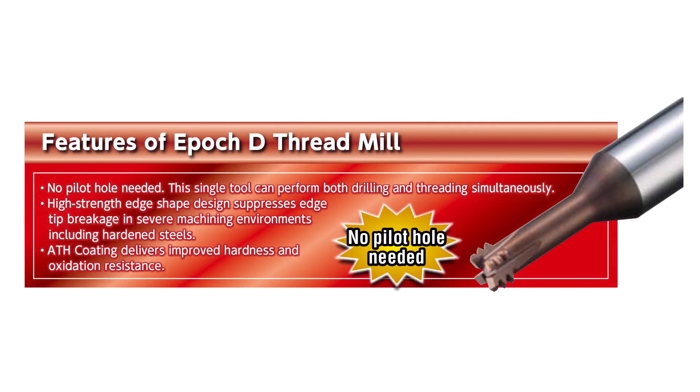Hello everyone, today we're going to be talking about the Moldino EDT thread mill and how to program this tool in Mastercam. This thread mill is a single lead thread mill that can cut the entire threaded hole without the need of a pilot drill. That is the big advantage of this tool. You can do this in hardened material and virtually any material, and you do not need to have a drill ahead of it. So today we're going to show you how to do this in Mastercam.

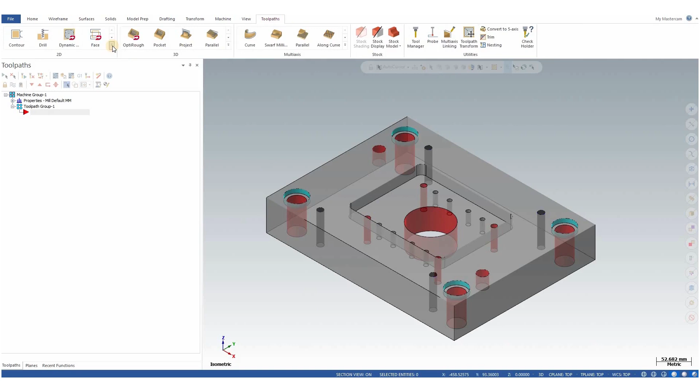And on this plate right here we have 4 threaded holes. They are M12 by 1.75, and we're going to show you how to do this to get the code to come out correctly for your machine. So the first thing that you want to do is go up to your toolpath and select thread milling. Once you've done that, then select the 4 holes that we're going to thread mill. You want to make sure that you select the geometry of the hole, and you want to double check and make sure that the hole is the correct size, the nominal size of the thread.

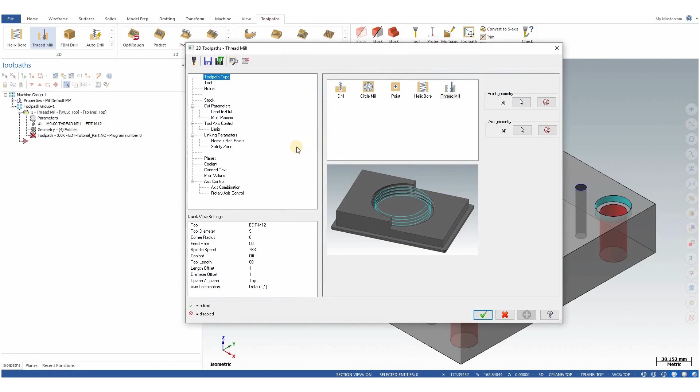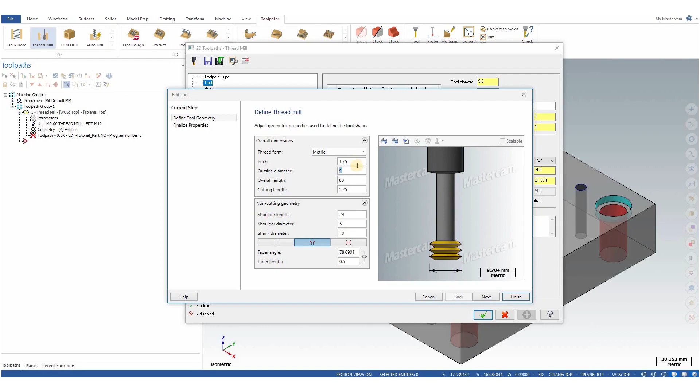So in the tool parameters, we're going to look at the cutting tool. I've already got it created. This is, like I said, an M12 by 1.75. You can see here that the tool has about 3 threads on it. That's how they're designed, but they really only cut with 1 thread. Please go to the catalog and get the dimensions of this thread mill, and you can see the lengths and the diameters that you'll need to create the tool. Like I said, our pitch is 1.75, and then we're going to put in our cutting length, which is about 3 threads.

Once you've done that, you can get the speeds and feeds out of the book for the material that you're cutting, but the main thing you want to look at is the spindle direction. Please make sure that the spindle direction is counterclockwise. This is a left-hand cutting thread, and it needs to spin the tool counterclockwise, or an M04 in a standard G-code program.

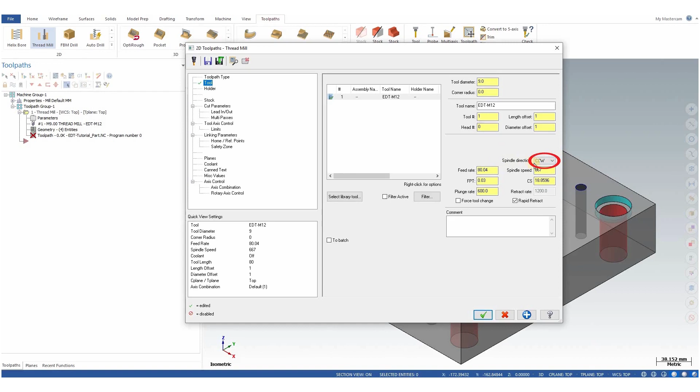Okay, moving on to cutting parameters. As we talked about earlier, this is a single lead thread. So in Mastercam, it defaults to the number of teeth as you put into your tool. So we're going to need to change that to 1 active tooth. We're going to do an ID thread. We're going to do a right hand thread. We need to make sure that we specify this thread goes from the top to the bottom instead of bottom to top.

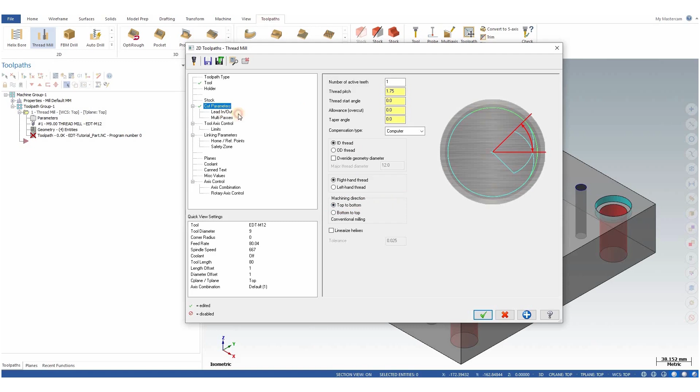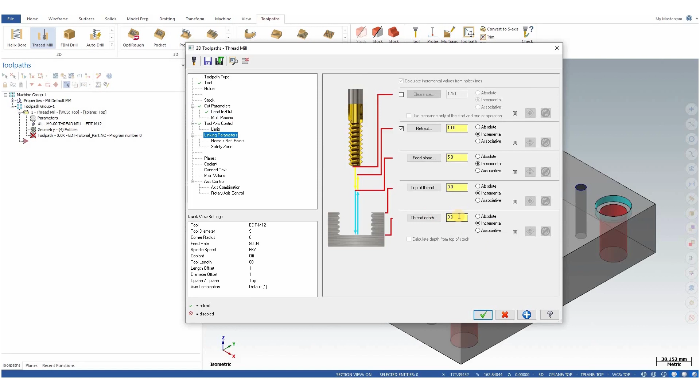Then on the lead in and the lead outs, we are going to start at the center and end at the center. We want to make sure that we end at the center so this tool does not hit the side of the threads as we exit the hole. And then we'll go into our linking parameters and add our depth, and then we will apply it, and we will look at the toolpath.

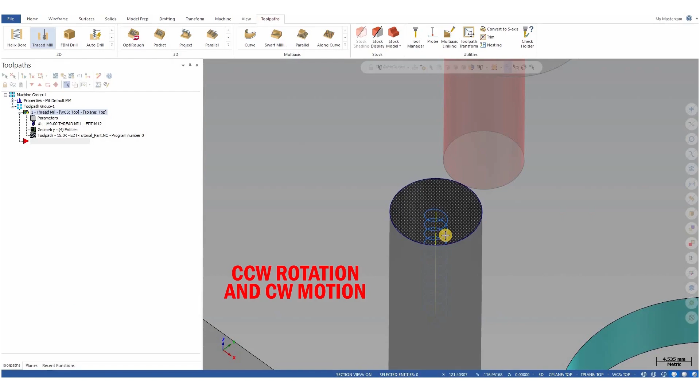And as you can see, we have a nice spiral down toolpath. The tool, keep in mind, is spinning counterclockwise, but the thread mill toolpath is moving in a clockwise motion. So it's a little confusing, but you want to make sure that it is a clockwise toolpath, but a counterclockwise tool rotation.

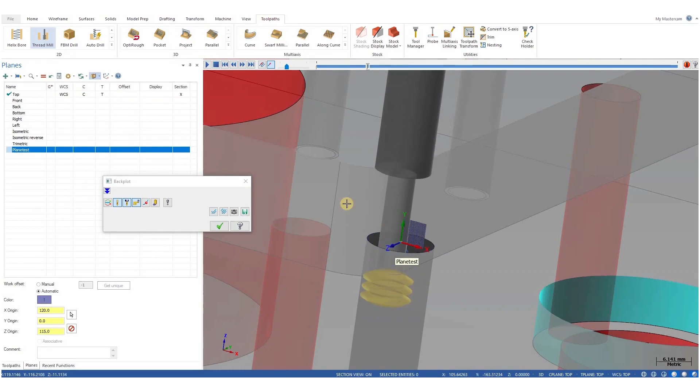Let's backplot this to see how it looks. You can see there's our tool, and we will go down and start at the center of the hole and spiral all the way down to our depth. And as we look at a section cut here of the part, we'll be able to see the tool cutting inside the hole as it should. And once it gets to the bottom, it will come to the center of the hole and retract out of the hole so we don't hit anything. And that's all you have to do.